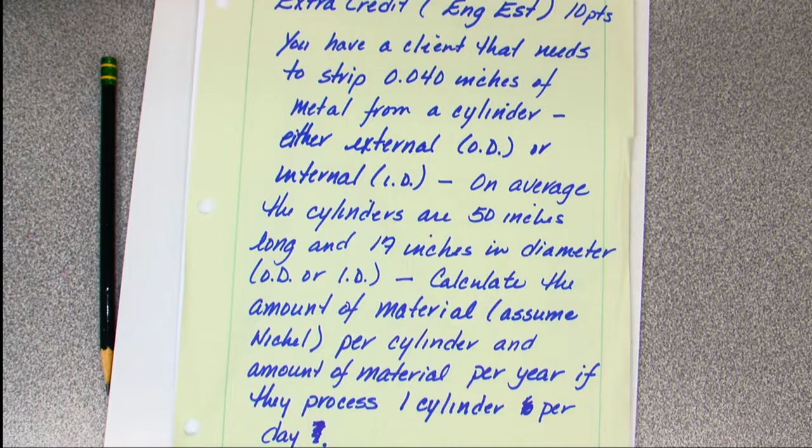These last chapters, even though we haven't necessarily gone over them in detail, I am going to cover a few things today using the author's PowerPoint, because most of these chapters in the second part of the book are on engineering fundamentals. They're introductions to the various things one calculates -- length units, fundamental units, some basic things you'll see in terms of heat, some basic things in terms of material selection, some of those kinds of things. And so it's a nice introduction. The homework is posted here, chapters 10 through 12.

You'll notice it's going to be a relatively light week, and we're kind of winding down. The last two things we'll end up doing is I'll have an Excel assignment, using Excel to do some calculations. So if you want to do this particular calculation in Excel, you could calculate it for a variety of different metals, putting in a different density for example -- that's good practice for you. So that's one thing that's left.

So we actually have this class, next week's class, the week after Thanksgiving's class, and then the final. I've already made up the final. The final has 20 questions on it. Your midterm is a very, very, very, very good study guide for the final.

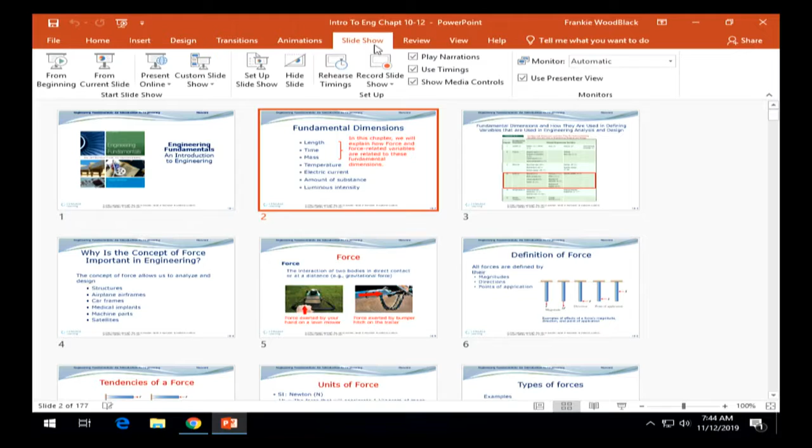So some things to look at when we're talking about units and tools. Our book is a really good book for giving you a lot of a smattering of different things, a lot of introduction materials. And when we talk about fundamental dimensions, length, time, and mass, they're fundamental dimensions.

Area is going to be a derived unit. Volume will be a derived unit. So our fundamental things, length, time, and mass - we do have another one that they don't talk about here, but that's charge. We do have another fundamental unit that's charge. And then we usually end up getting a variety of different properties, substances, calculations that we're going to use those fundamental units in. And we use dimensional analysis.

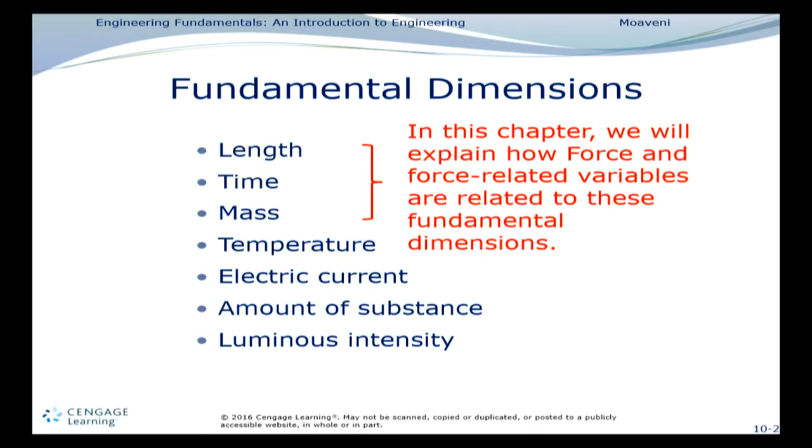Temperature is a weird one, because temperature is kind of relative. It's not fundamental per se. We do define temperature in terms of Kelvin as a fundamental quantity, but temperature comes and arises from the zeroth law of thermodynamics. It's really not what we're wanting to get at when we deal with temperature. What we want to get at is that exchange of heat. That's what we're really after. So it's a little different. We get a variety of units, and that's why the tables in our book are great.

This also violates PowerPoint rules, and I did not make this PowerPoint, but it's very difficult to see. We got a lot of information on there, but we use these things for a variety of aspects. This is a nice chart in that it relates the fundamental units to specific engineering factors. And if anybody ever wants to see it, I actually have a book of engineering conversion factors.

That's all it is, and it has a variety of different engineering conversions from a variety of different things, like hogsheads. Yes, hogshead is an actual unit. Fortnights are actual units too. So you could get some really strange units for a variety of reasons. Hogsheads happens to be in the brewing industry, and it's a leftover - there's like 3 hogsheads to a keg, or 3 kegs to a hogshead, something along those lines. It's an actual word for a different type of barrel.

So there's barrels, and then there's drums. A crude oil barrel is 42 gallons. A drum is 55 gallons. So you can get some really strange conversions based off of what you're looking at and how the terminology is, which becomes very, very important that you know what you're dealing with - because a barrel in one person's industry may not be the same as a barrel in another person's industry.

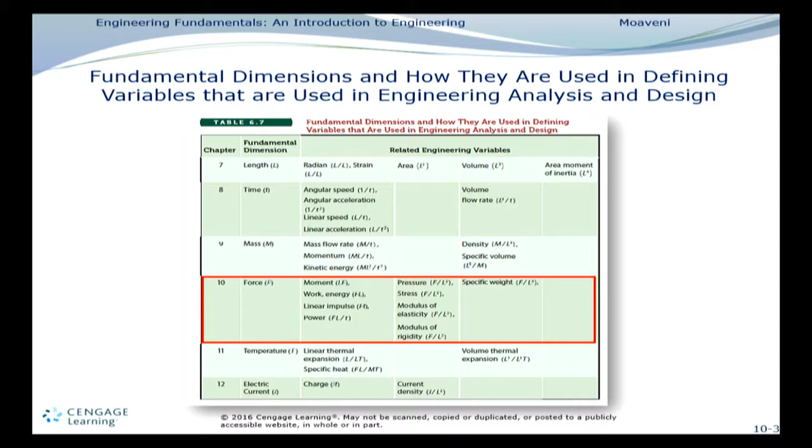And the other thing is the units that they actually use, because you may get an M to mean 1,000, or you may get an M to mean 1,000,000, or you may get M to mean mega. So you have to really, really watch it when you're looking at units and using the common units for the industry you're in.

So this one we're starting off with this chapter, and we're talking about forces. Forces you're going to get in engineering physics. And so why do we look at forces? Well, there's a lot of different things that are happening when we're dealing with structures and how we're going to balance out those structures.

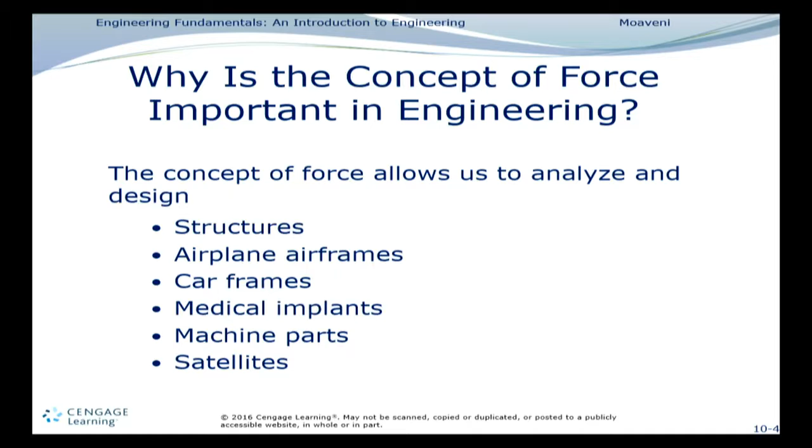Also, forces - which we don't really talk about until you get to material properties, like this morning - we're out there looking at the forces on our engines, and the forces on metal, and when it's cold, things have different properties. They may be brittle, and brittle is not necessarily good - though in some cases brittle is good, depending on which way you're wanting to look at it.

So if we're dealing with force, that's this chapter. We're dealing with force, we want to look at that. We look at our forces, and it's our interactions between two bodies in direct contact. So you can actually apply a direct force. Now remember, there's two types of forces, and we'll get into this. There's the direct contact force, like what you're seeing here.

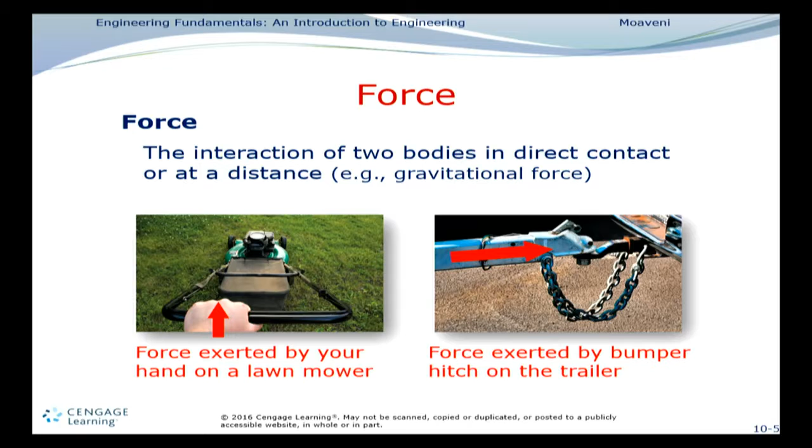And then there's a field force. Field forces are like gravity, where you can have a ball above the surface of the earth and you let go and it's going to fall to the surface. Or you've got two charged particles and they can either be attracted or repulsive. You've got a magnetic field that you'll go in and have things that are out there. So our forces that are going to be in there - but when we get into engineering, where the force is applied and how we move those forces around when we actually do the calculations becomes very important.

Because we will get different things that we have to look at, whether or not we're going to get torques, whether or not we're going to get stresses, whether or not we're going to see different pieces. But we can shift forces around.

Statics, engineering statics and engineering dynamics. Statics is all about maintaining equilibrium. Dynamics is when we put things in motion.

So that's what we typically start out with. When we do engineering classes, why on earth do you have to take general physics? Or engineering physics, or whichever physics it is. Those are the fundamentals. We're going to give you the language of what it is we're looking at, and we're going to give you an overview. And when you hear it, I'll tell you, we lie to you. We lie to you all the time.

We lie in the sense that if you're in physics class, how many states of matter are there? Four. Physics class, there are four states of matter, sorta. Chemistry class, how many states of matter are there? Three. Sorta. Right now there's an argument, is there 9, 11, or 13 states of matter? So we lie in the sense that in a general overview course, we're going to simplify things.

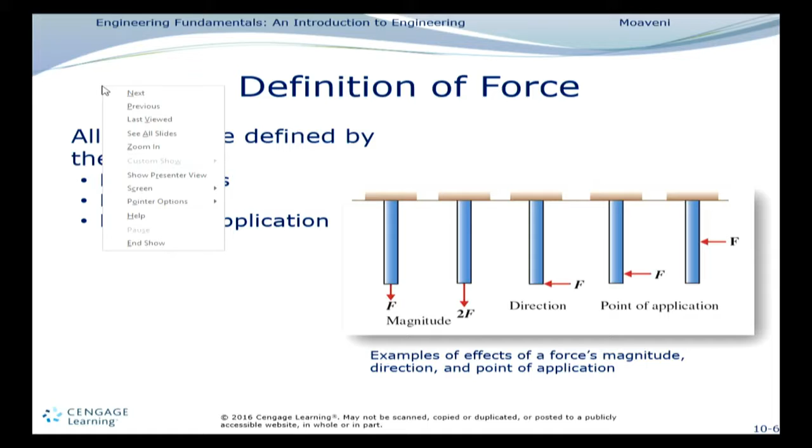We look at it at various different levels. So when we say we're applying a force, sometimes it's pretty clear and easy where that force is being applied, sometimes it's not. And the direction of the application of the force can also have a huge impact, not only on the material, but on the interaction that we're ultimately going to see. So that's where we're headed.

So you can do things on tendencies of force, and this gets really fun, because not only do we get bending, twisting, elongation, compression, we can also have a force that causes us to do translational motion versus rotational motion. And if you think about it, just the act of rolling a can down an inclined plane: if I take a can and let it slide down an inclined plane, it's going to have one behavior. That's strictly translational motion. But if I take a can and let it roll down the inclined plane, I'm going to get a whole set of different behaviors.

And that's why we start looking at the various aspects that we have in engineering.

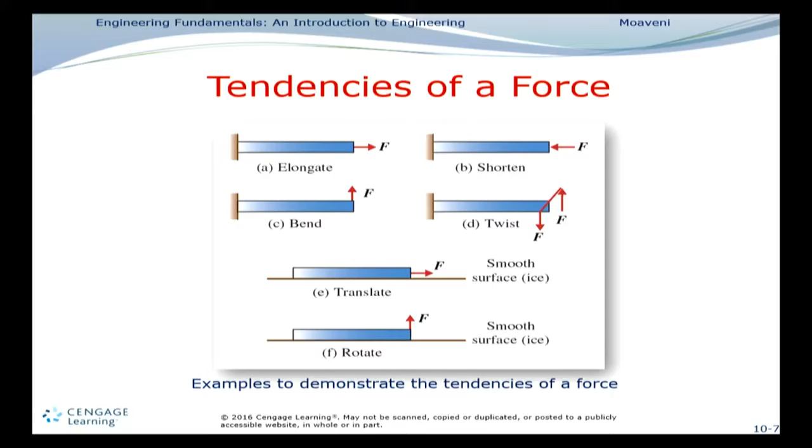So we get some tendencies for force. You've got a whole chapter on forces. There's Newton's laws, and we get our reaction forces.

Then we get things like pressure. Pressure's not different, it's force per unit area. I don't care what units I've got it in, but how we utilize pressure is going to be very different depending on whether I have a solid or a fluid.

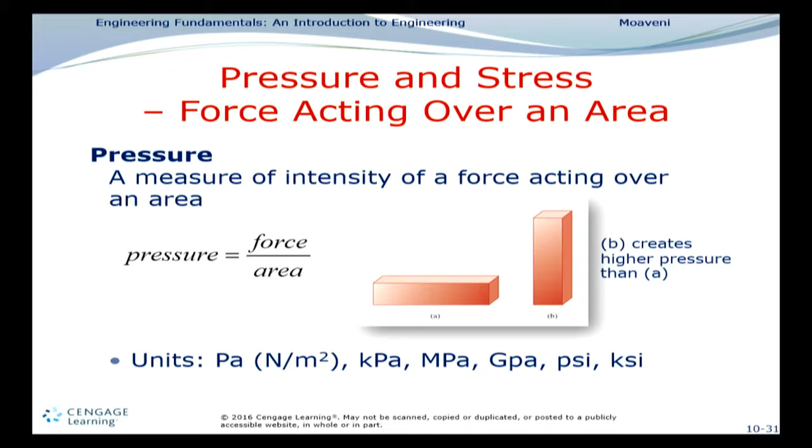If I have a liquid, liquids are incompressible, or tend to be, which allows us to have hydraulics. Now liquids do have a little bit of compressibility, but for hydraulics, that's not a big issue. So pressure gives us a whole lot of different things we start working with, force acting over an area.

Other things, this is where we get into common units, because most of us don't work in pascals. Very rarely, at least not here in the U.S. We're working in PSI or PSIG. PSIG means gauge pressure, because that takes care of atmospheres.

We still work in millimeters or inches of mercury, even though buying a barometer with mercury in it now is very difficult. But we still use those units. We do PSF, pounds per square feet, pounds per square inch, and a lot of those different units for pressure.

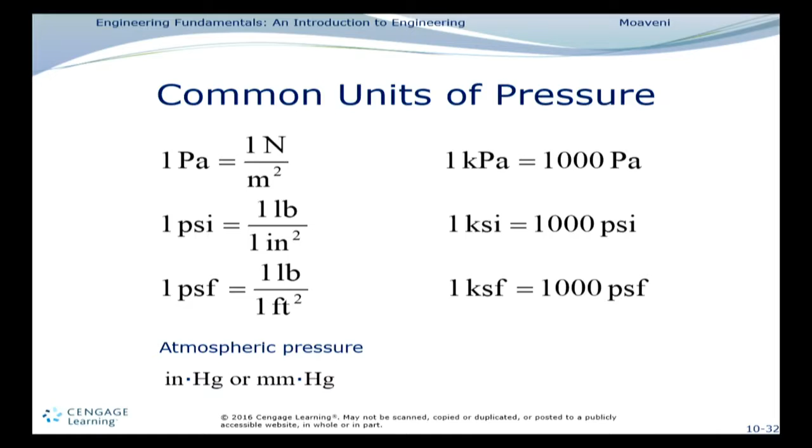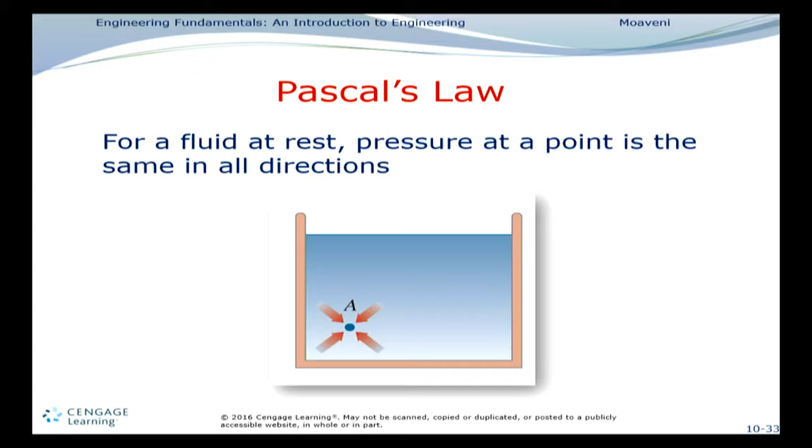It's Pascal's law that allows us to have hydraulics, and hydraulics makes our work a lot easier. We get strange things that can affect hydraulics using unusual fluids. We can use electrorheological fluids, impacted by an electric field, or ferrofluids, impacted by magnetic fields. Ferrofluids are really good for certain seals because we can hold them in place with magnetic fields and change their character by applying the field.

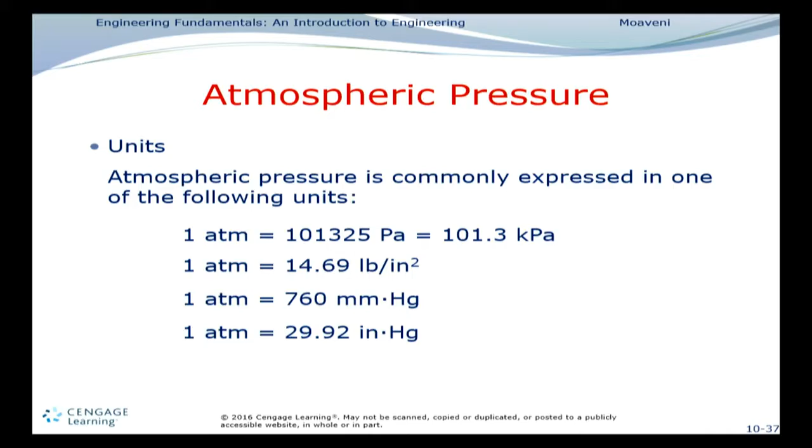So electrorheological fluids and ferrofluids are cool things. You can look at Pascal's law, our buoyant force, atmospheric pressures, and various units of pressure.

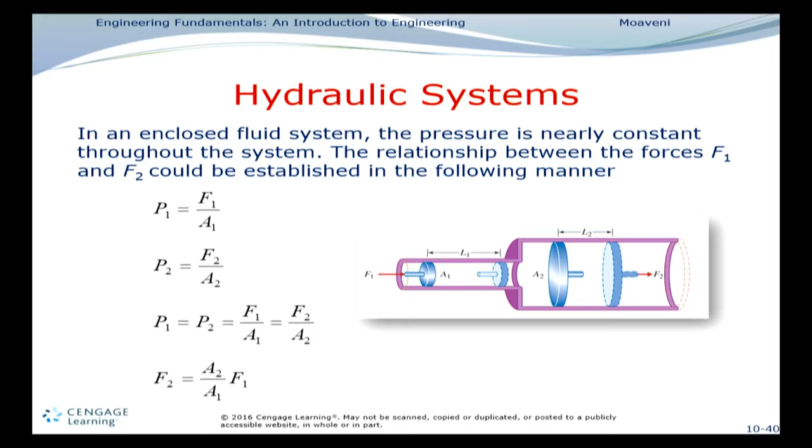We get material. Let's look at a hydraulic system for fun. Hydraulic systems say my force per unit area, the pressure throughout the liquid, has to be the same, so I can use it for pistons. Things like doing scales when I take a semi and put it on a pad, that works. Hydraulic lifts are all based off hydraulic pressure, and it can magnify a little bit of force into a lot of force for what we're doing.

We can apply force onto a little piston, and that same pressure is spread over the other piston, which will lift. That device right there, that's a car jack, a nice little one that a lot of us have. Some of us have more than others - we ended up with a whole bunch at an auction one time. Very useful, but you don't normally think about ending up with a whole bunch of them.

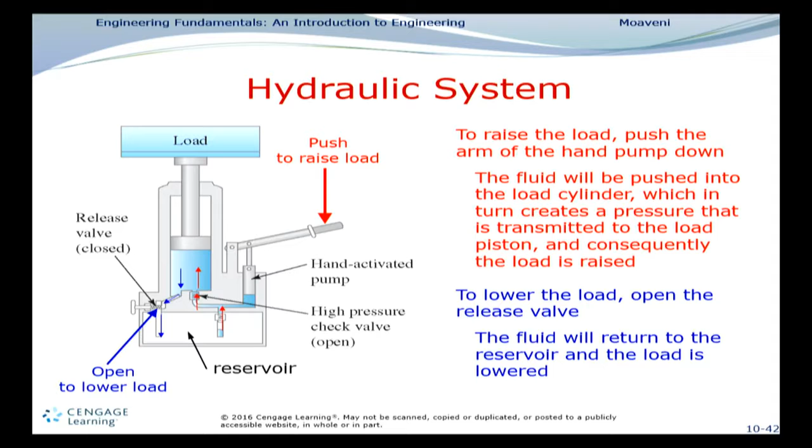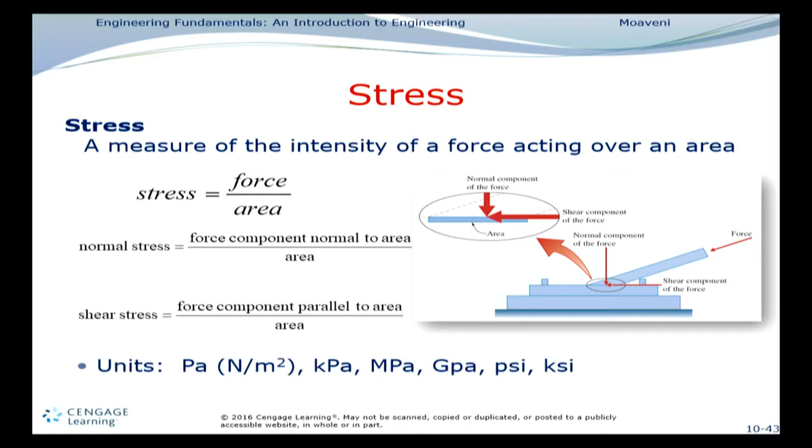That's going to cause things like stresses, and when we talk about stress fractures and stress in materials, that's where strength of materials comes into play, because we can have a lot of stress where forces act, get compressive effects, things can fail, and then we get what we call moduluses of elasticity. How is it going to stretch?

What's interesting is that if I take a rubber band and stretch it, it's going to go right back to its normal shape, unless we overstretch it. Then we start getting deformation, and ultimately we break.

It turns out, no matter what we have, there's a range of forces I can apply to a metal bar and it's going to go back to its original shape. It's going to be elastic. But eventually it's going to reach a place where I get deformation, and eventually somewhere I can get failure.

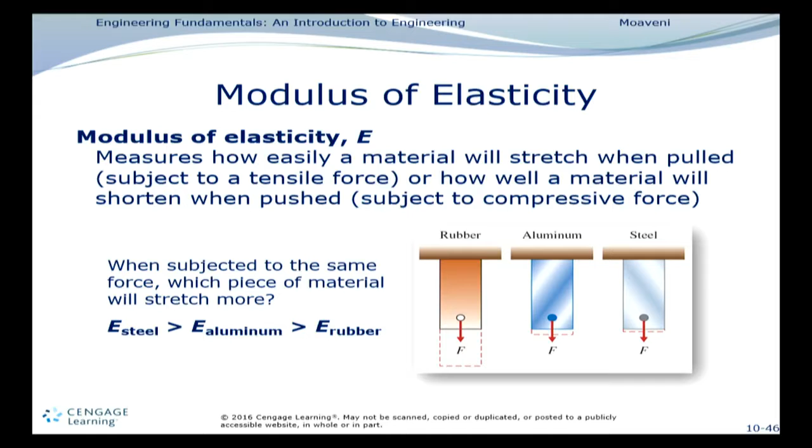We actually can measure this for a variety of materials. They just show rubber, aluminum, and steel here, but for polymers this becomes a really important piece, and we can do tensile strength testing. There's a lot of things that affect tensile strength, and it is directional - if I have carbon fiber in a tensile strength apparatus like this, pulling along the fiber, carbon fiber has an amazing tensile strength.

But even the lightest tap perpendicular to it is going to break it. Think about your mechanical pencil leads - that's exactly what's happening in a carbon fiber. That mechanical pencil lead is going to be able to stretch in one direction versus another.

Everybody knows finger handcuffs, right? Everybody's played with them. If I pull it apart, it's going to stretch out, and I've got my fingers tucked, but I have to go in, and you have to be kind of counterintuitive as to how you can get in and out. It's very similar for things like nanotubes and other structures that can be very brittle in one direction and very strong in another.

So I read an article about nanotubes yesterday. They're changing the geometry and the angle at which the hexagons are laid out to try and increase the tensile strength. Yep, there's lots of work on nanotubes, nanofibers, nanowhiskers.